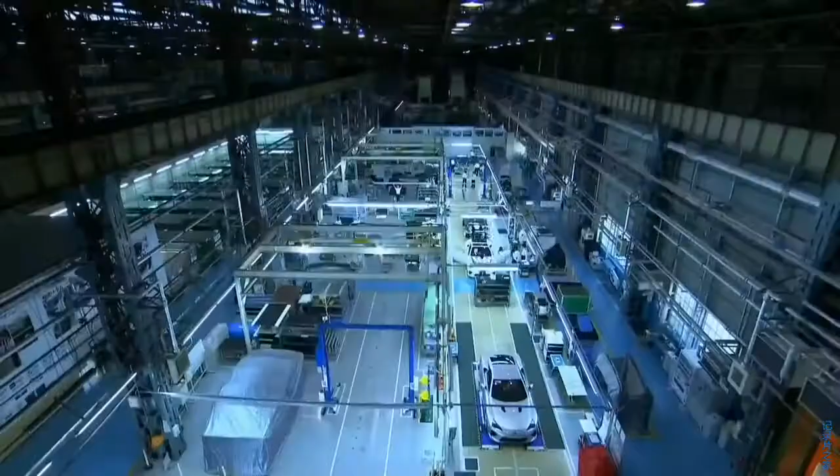Inside this top-secret mega factory, a car like no other is taking shape. Craftsmen hand-build what they consider an automotive work of art. Money is no object. This machine must redefine a billion-dollar brand. Failure, not an option.

Japanese marque Lexus sells itself on luxury, marketing its cars as elegant, quiet, high-tech and efficient. Now, a different kind of car wears the Lexus badge, the LFA. Aggressive, loud, agile. Highest revving V10 engine in a production car. 325 kilometers per hour. A car like nothing Lexus has ever produced before.

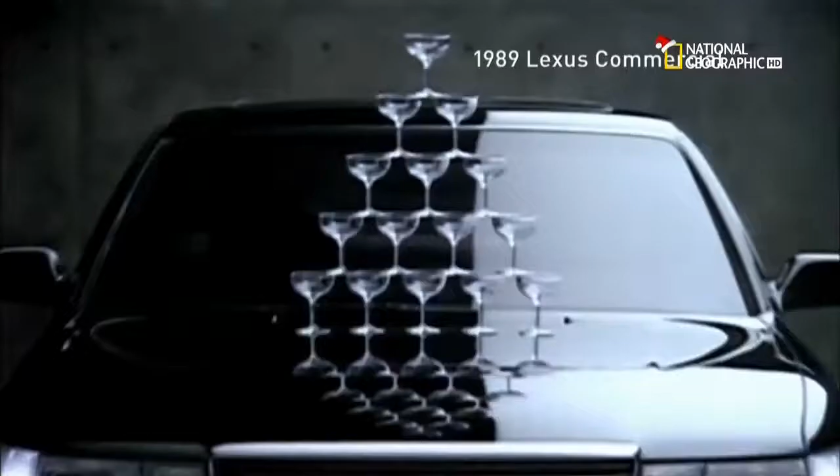Lexus is just over 20 years old. The world's largest car maker, Toyota, created the brand to compete with other high-flying luxury marques, Mercedes-Benz, BMW and Jaguar. It's worked. Lexus is now one of the biggest-selling high-end marques in the United States. But now, Lexus is out to inject more excitement into their brand.

Chief engineer Tanahashi Haruhiko is the man behind this vision. The LFA has a passion, an emotion that isn't in earlier Lexus cars. We wanted to move the brand in that direction. That's how we made this car. Tanahashi believes the marque can mean more than just luxury. I wanted to make a new sports car, one that could stand against the long-established European so-called supercars, Porsche, Ferrari and Lamborghini, to show that we Japanese could make something like that.

It's a risk. The company hasn't made anything like this before. Their reputation depends on its success. Chief engineer Tanahashi is stepping into the unknown. He must build a car, a team, and a factory from scratch. Basically, we proceeded at my discretion. And where there weren't any rails, I laid them down.

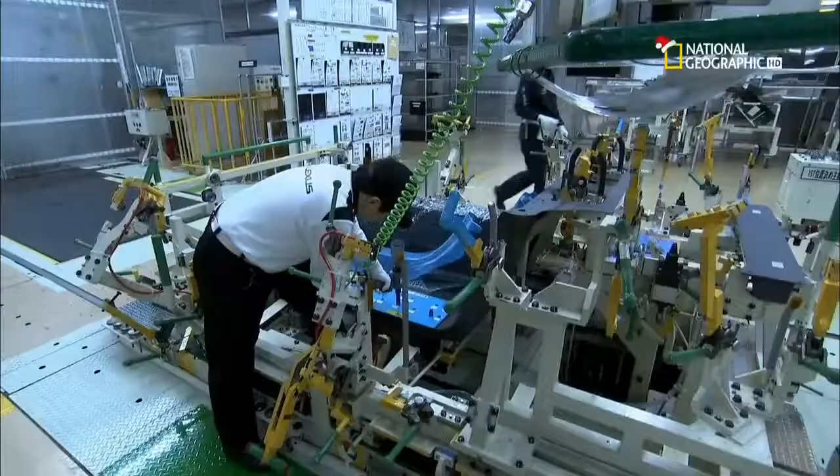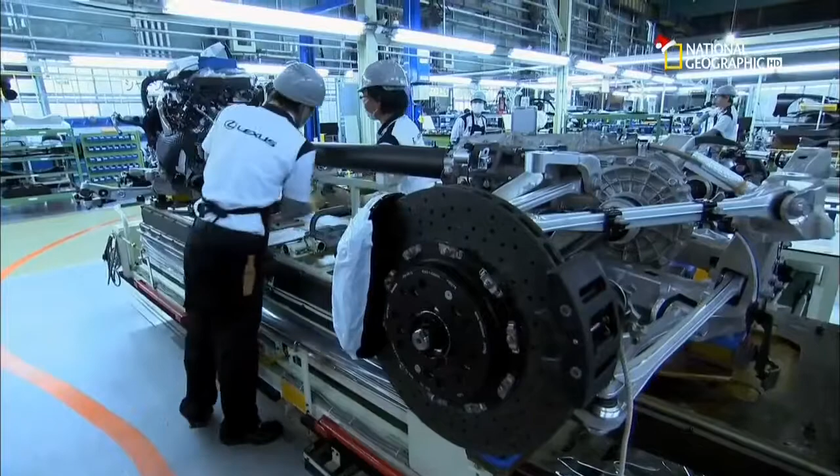All the associates here at the LFA Works feel they are artisans, not just operators. These artisans are known as takumi, Japanese for craftsmen. A status only conferred on the most highly trained, skilled workers. Each and every associate at the LFA Works is seeking to achieve perfection, taking this challenge on with a sort of samurai spirit.

Yamanaka Shigeru is manager of the LFA Works. His teamwork credentials come from another time-honored Japanese tradition: baseball. Before this, I was working as manager of the Toyota Motor Corporation baseball team, which brought people together from lots of different factories. It was because I could manage that organization that I was made manager here.

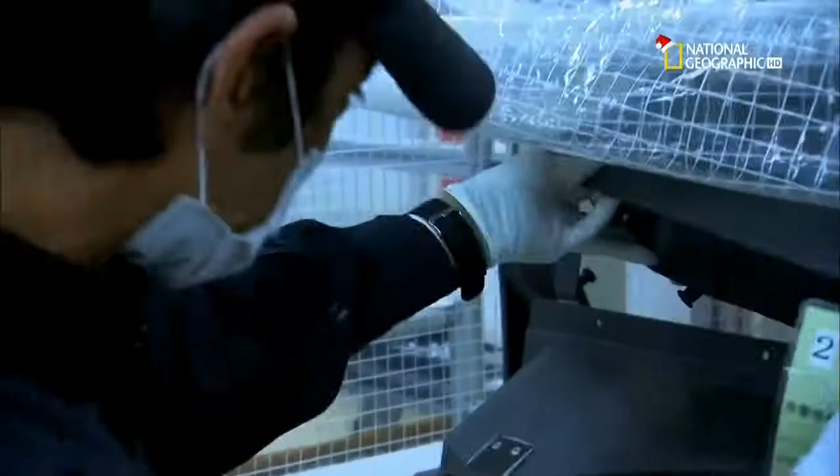To reach their goal, this tight-knit team utilized sophisticated tools and materials to build their car. The most important of these is carbon fiber composite. Carbon is crucial to the car's performance. It's a material 5 times the strength of steel, yet a quarter the weight. It's the construction material of choice for both Formula One racing cars and the aerospace industry. The company even make their own carbon fiber here on site. Up until now, no television cameras have ever been allowed inside this top-secret facility.

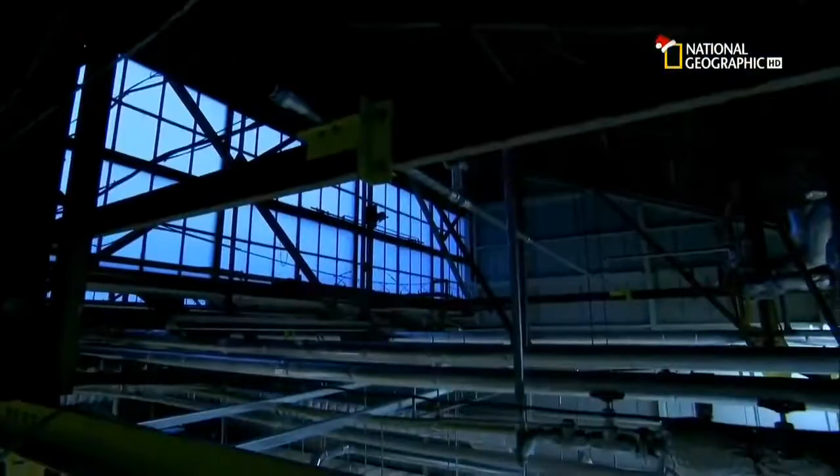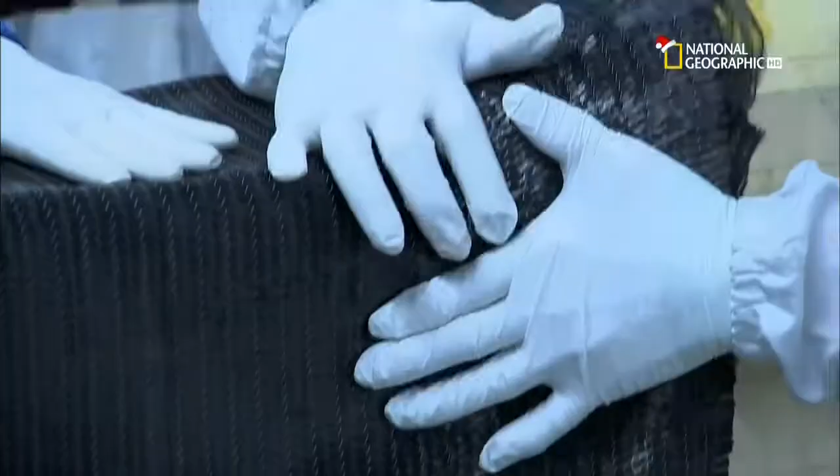First, simple strands of carbon fiber are woven into a pliable cloth using an automated weaving machine. This fabric is then transformed through heat, pressure, epoxy resin and labor-intensive techniques into the car's core known as the tub. The tub is pieced together like a 3D jigsaw. It starts with the construction of the floor. To make it, precisely cut carbon fiber cloth is lifted onto a mold. Next, skilled takumi smooth the supple fabric over the mold. This one is for the transmission tunnel that will house the drive shaft and exhaust.

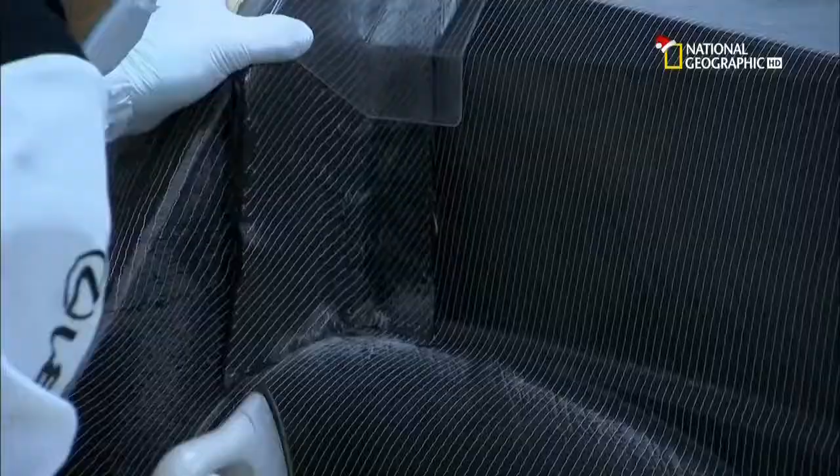In very complex areas like this, the fabric inevitably becomes frayed and not very neat. The associates work with these areas as if working with silk, taking great care every day. They also wear masks to avoid breathing in the hazardous fibers. In the beginning, the associates found it very difficult to work this material. It was much easier when they used an iron.

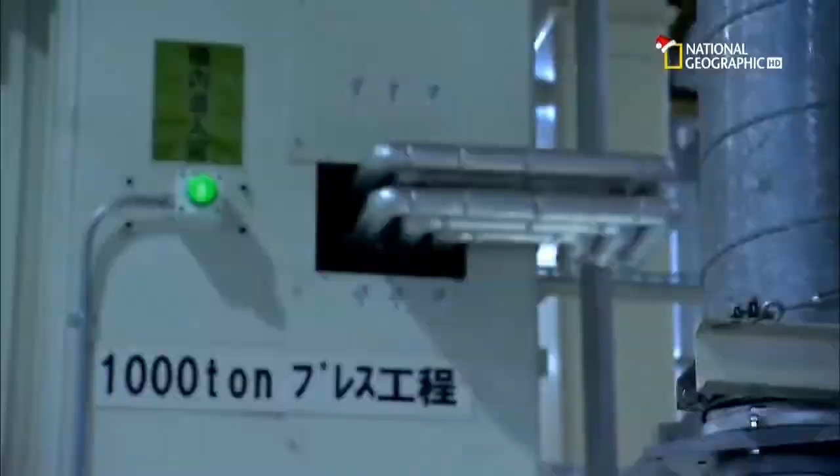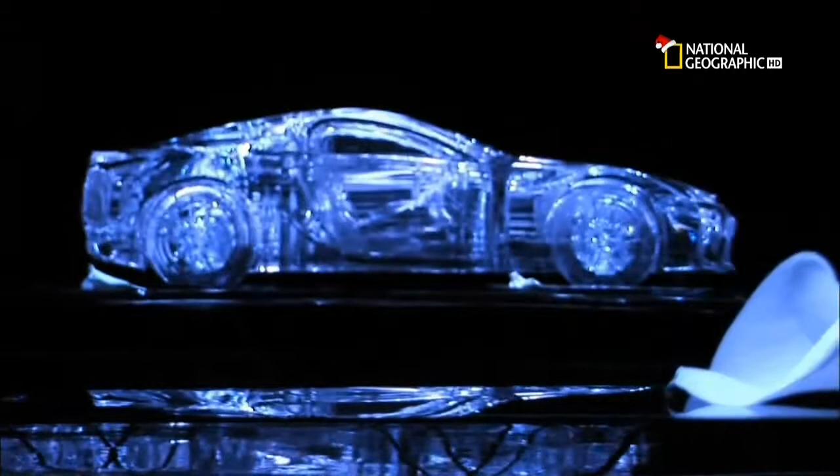Back in 2000, the concept of a world-beating supercar only exists in one man's head. At the company, I talked to just a small group of people at the top, not expecting anything, and they said, go ahead and try. With permission to proceed, Tanahashi gathers a team of engineers around him, and they start to make the basic engineering decisions. In the beginning, we planned to make the body from aluminium.

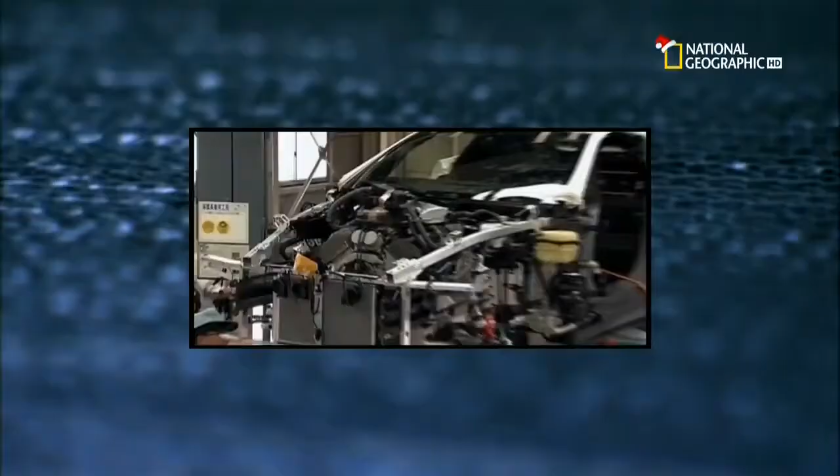But Tanahashi is fascinated with the possibilities offered by carbon. Developing a supercar, a super sports car, carbon fiber was a material I really wanted to try using, if at all possible. But this wonder material has its drawbacks. It's expensive, and the company has never used it to build any of their cars before. Despite these significant challenges, Tanahashi gets his way.

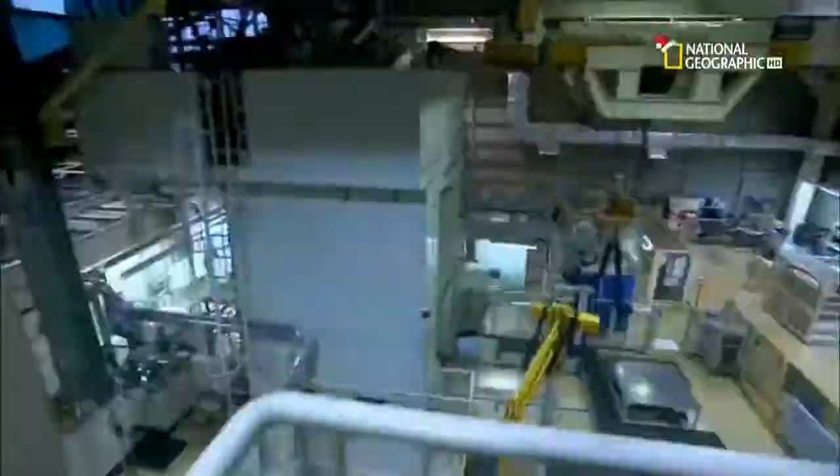In 2005, my boss said, why not go for carbon? Slapping me on the shoulder. And I made the decision to go for carbon then. It's a bold step. Everyone involved with this project must master a material they have no experience with at all. It was the first time the workers had touched carbon, and everything about it was difficult for the workers.

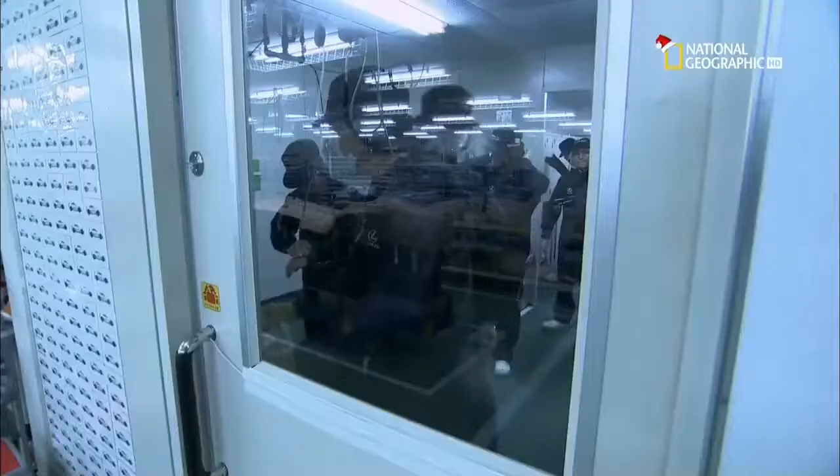In the state-of-the-art carbon fibre facility, the Takumi are returning from lunch. They vacuum themselves down to remove any foreign particles before entering a highly confidential sealed room. Here, the majority of the tub's central frame is created using the most intricate techniques. In this process, an automated laser cuts out hundreds of individual shapes from carbon fibre cloth that's been pre-impregnated with a sticky resin.

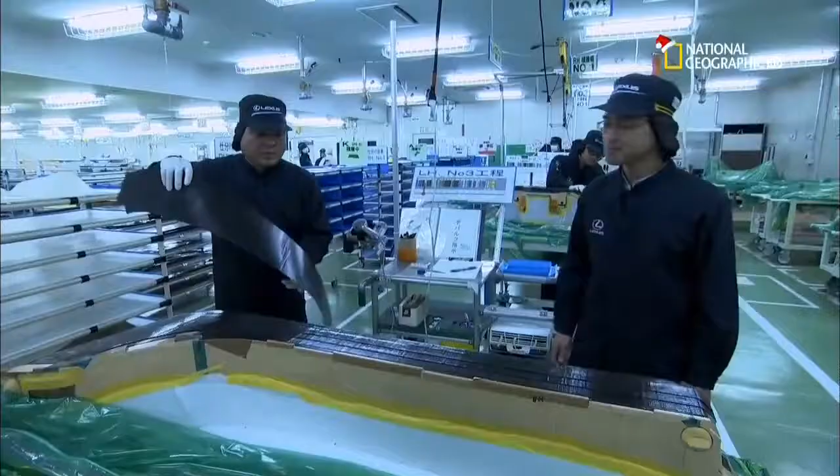Next, Takumi layer the cutouts, up to 20 sheets deep, onto a mould. This one will make the right side panel. The associate uses a dryer to raise the temperature of the laminate and half melts the resin as he applies it. The tacky cutouts stick to each other and any gaps are squeezed out using a vacuum bag that forces them together.

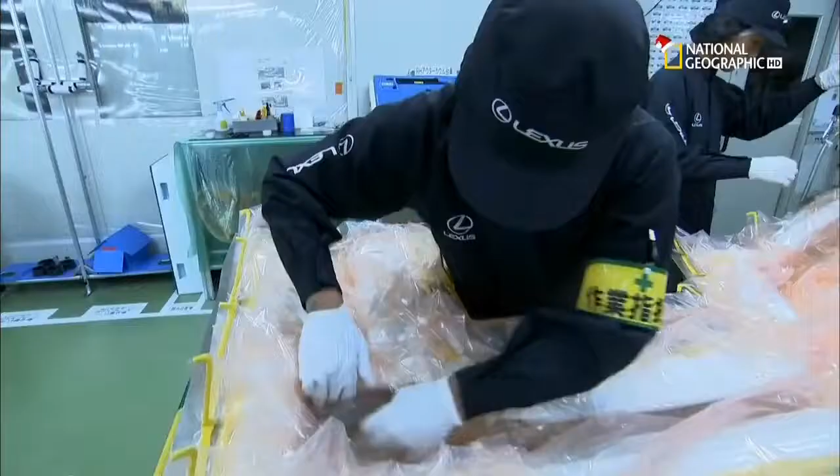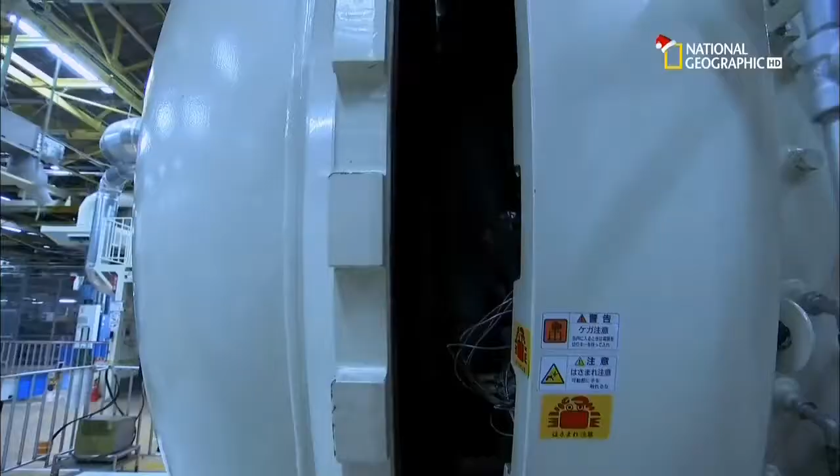The shrink-wrapped side panel is then wheeled across the works and loaded into a pressurized oven. Baking overnight at 150 degrees Celsius sets the resin, resulting in a side panel that's both ultra-strong and ultra-light. An aluminium equivalent would be twice as heavy. Weight saving is the holy grail for all auto engineers. Less weight and more power leads to increased acceleration, and speed defines a supercar.

The body of the LFA is 65% carbon fibre, helping it accelerate from 0 to 100 kilometers per hour in 3.7 seconds. If made of aluminium, it would be 100 kilograms heavier, like having a sumo wrestler in the passenger seat. As it is, this car weighs just 1,400 kilograms all in.

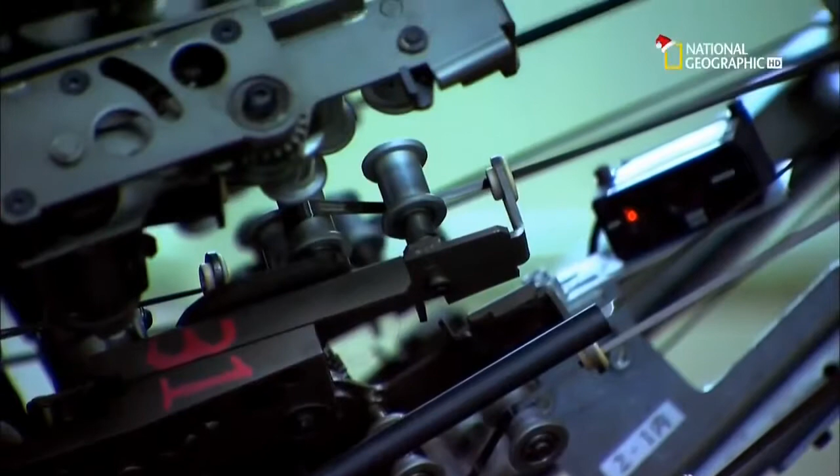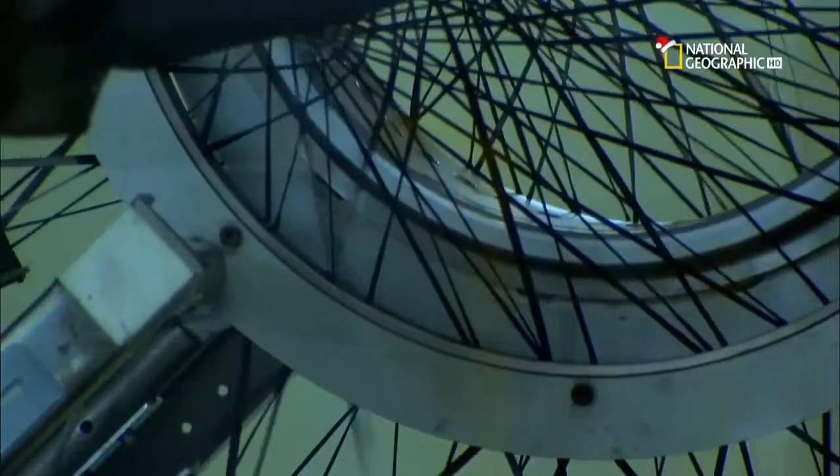Back at the factory, in a locked room, a bespoke machine creates two crucial parts to complete the tub's construction. The roof rails support the windscreen, as well as protecting the driver if the car rolls over. This custom-built circular loom weaves the carbon rail in 3D. It uses lasers to control the feed of carbon fibre strands onto 144 bobbins. These knit the carbon around a top-secret automated template that's fed through the centre of the loom. This is done twice over to cross-hatch the carbon weave, so giving the rail its strength.

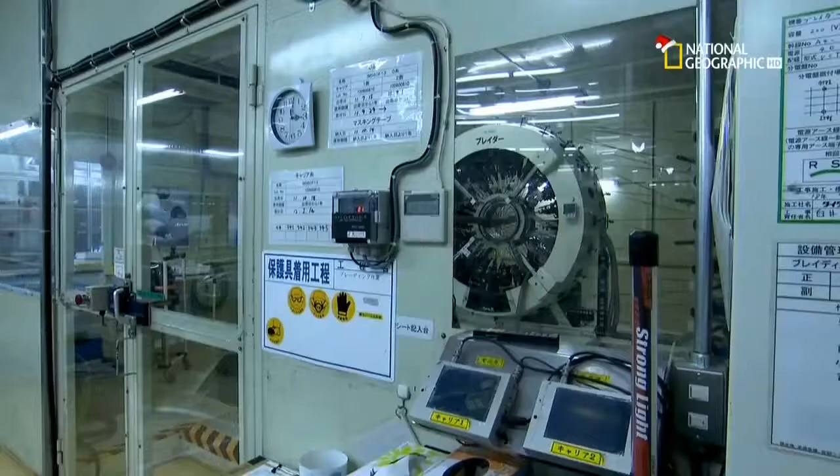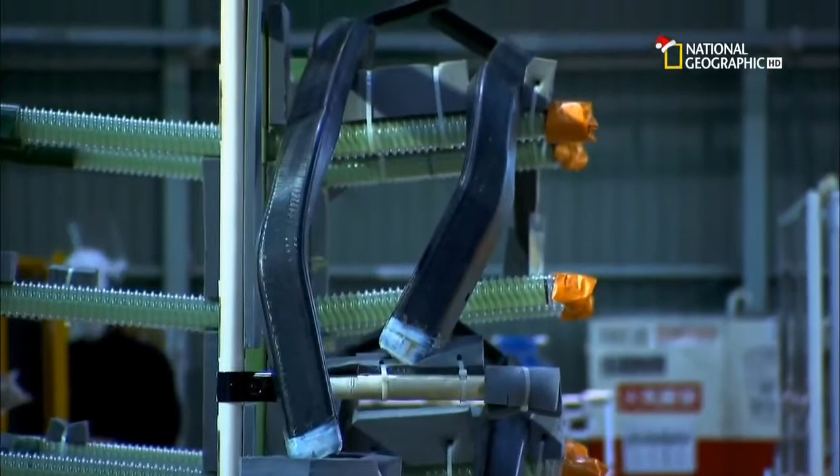The whole mechanism has its own control box, and for good reason. If something goes wrong, even a little thing, the shape gets distorted immediately, so the operator constantly pays attention to avoid this. The roof rail is heated and impregnated with more resin to complete its metamorphosis from a flexible tube to a rock-hard rail. You may think that this is quite heavy, but it is only 2 kilograms.

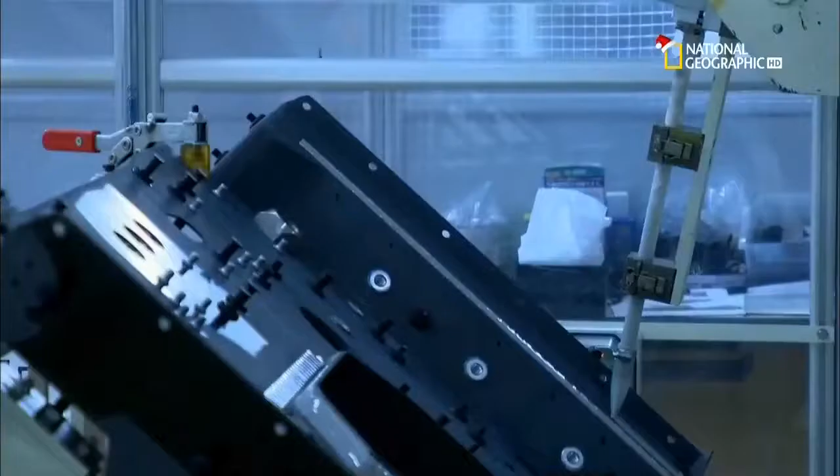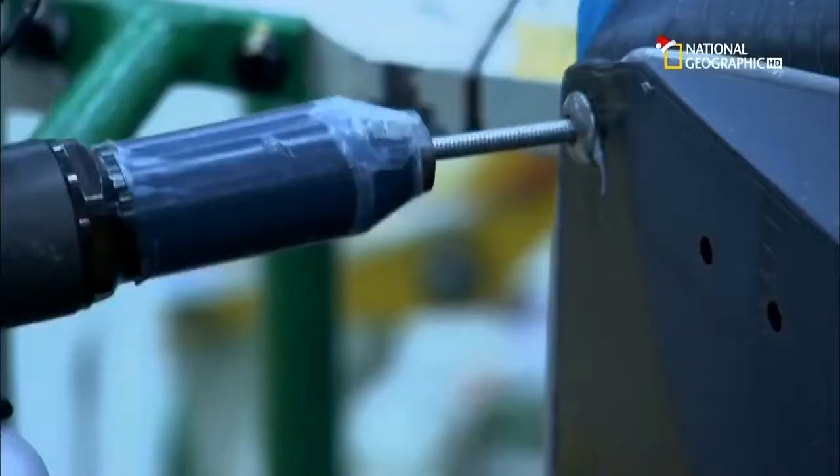The tub is bonded in another top-secret jig. First, a super-strong adhesive, known as epoxy resin, is applied by robot and hand to each of the parts. The separate parts are transferred to the jig and locked in place. Pop rivets keep the pieces aligned. To cure the epoxy, the jig is pushed into an oven and then baked for 60 minutes at 60 degrees Celsius. The resulting tub is so strong, it acts as both the structural core of the car and as a crush-resistant safety cell, should the car crash.

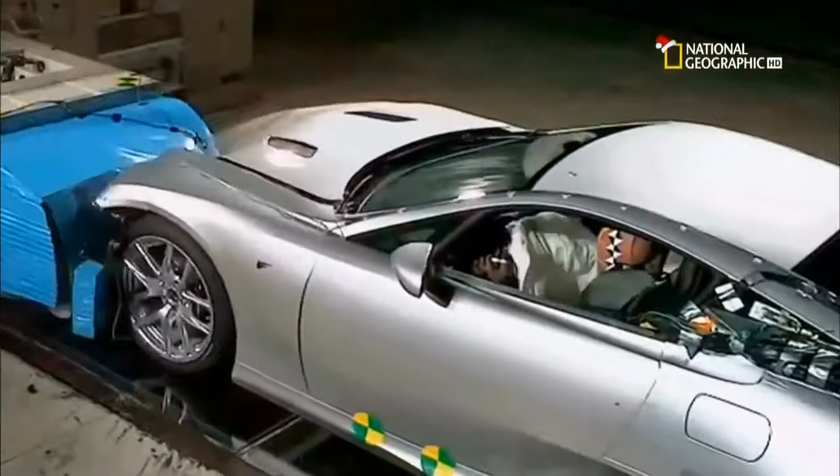The challenge now is for Matsumoto Kengo, chief designer of the LFA, to create a car with a body as technical as it is elegant. For us, aerodynamics, heat and airflow management should be tangible in the design.

A conventional car cools its engine with forward-mounted radiators that suck cold air through a front grille. Not the LFA. Front space is at a premium, so coolant is pumped from the hot engine to twin radiators mounted behind the car's rear wheels. Matsumoto had to shape the car to funnel cold air to these vital components.

Airflow management is optimally controlled by setting the angle between the door mirror and the cabin. It goes past the cabin and smoothly into the air intake for the rear radiator. This shape is not just for styling. The intake is deliberately formed here, from the base of the glass. The result is an airflow system capable of cooling the engine even under the most extreme race conditions.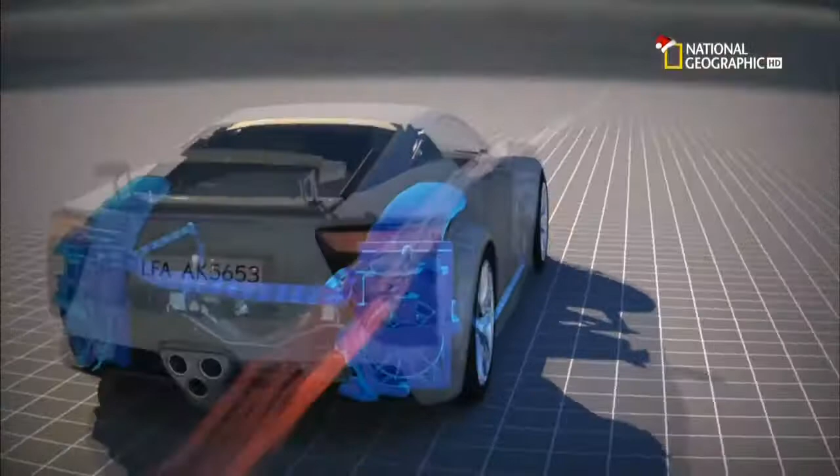It's 8:45 in the morning at the LFA works. The Takumi are warming up for an 8-hour shift ahead. Their first task is to greet the bare cabin as it arrives from its 15-day build in carbon round the corner. In assembly, the cabin will progress through 4 positions: trim, chassis, final, and alignment.

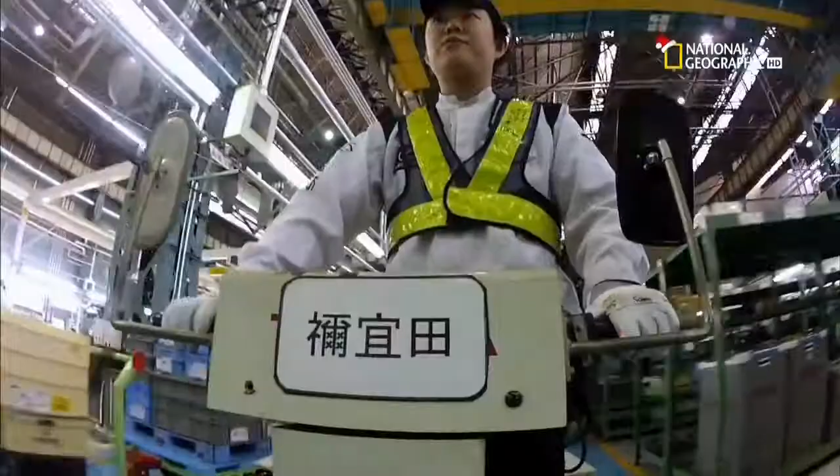15,000 parts go into making an LFA. The first of these are attached here in trim. Just meters away, other Takumi assemble the drivetrain and suspension. The drivetrain comprises the transmission, torque tube, and last but not least, a 4.8-litre V10.

The location of this engine is crucial to the car's entire concept. I wanted to build the car around the people in it. And for a supercar that puts people first, the optimum place for the engine is front mid. This front mid location puts the engine between the driver and the car's front wheels. With the transmission placed at the rear, the driver is in the centre and the car feels balanced to drive.

The aim is to make the car's handling as good as possible. But a front mid configuration dramatically restricts the space available for the engine. Tanahashi has a problem. You need an engine of a certain size with a certain degree of compactness, but you want a high-powered engine as well. Tanahashi needs a small engine to fit in the restricted engine space, but he also needs the power of a large engine because power equals speed.

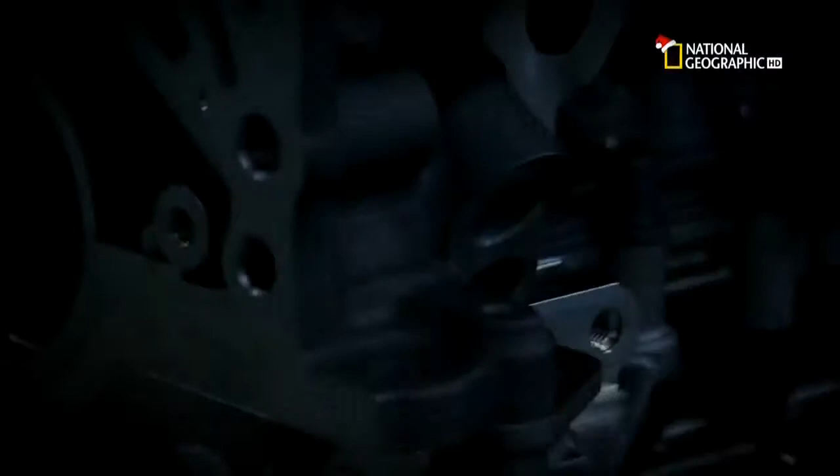And that isn't all. The high-pitched sound of Formula One makes you shiver, doesn't it? I really wanted to have that as part of the LFA. Only a high-revving V10 engine supplies this combination of power and sound, but a traditional V10 is too big for his mid-front configuration. Lexus have made nothing like this before. Their production line cars use 6- and 8-cylinder engines engineered for a super quiet ride. This V10 will be the opposite.

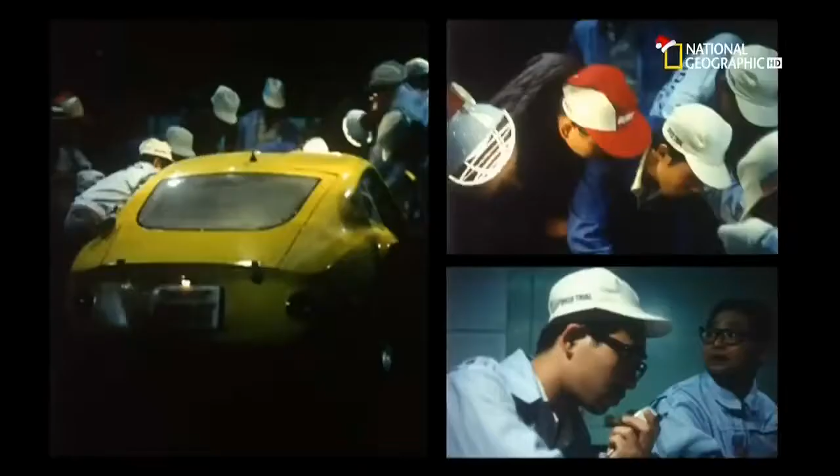Tanahashi turns to some old friends for help. We are a motorcycle manufacturer. We understand power alone is not enough in a vehicle. For a sports car, small and lightweight is critical. For almost half a century, Yamaha have worked with Toyota to create high-powered lightweight engines and cars. The legendary 2000 GT, star of the James Bond film You Only Live Twice, and Japan's first true sports car, was the first fruit of their collaboration.

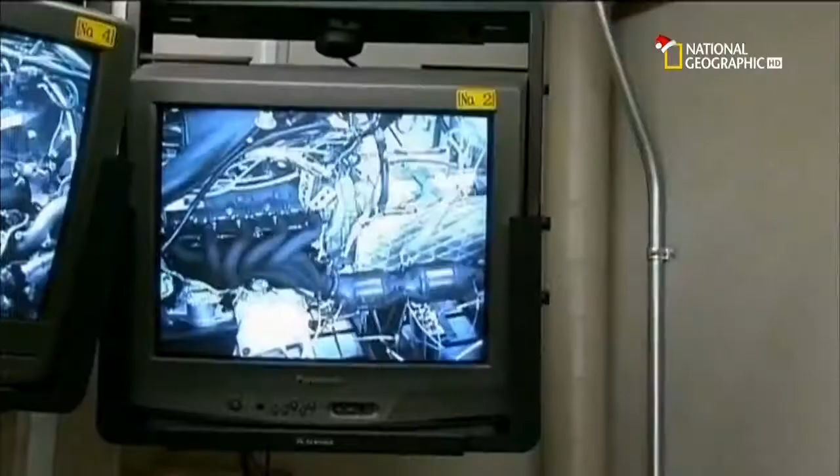Headed by Lexus engine guru Okamoto Takemitsu, the team sets itself an ambitious goal: to create a naturally aspirated V10 engine as compact as a traditional Lexus V8, with the weight of a V6. I wanted to create something different to any other supercar engine. Normally, engineers use turbochargers to boost the output of smaller engines to simulate V10 power. But turbocharged engines don't have the rapid response, acceleration or sound of a naturally aspirated V10.

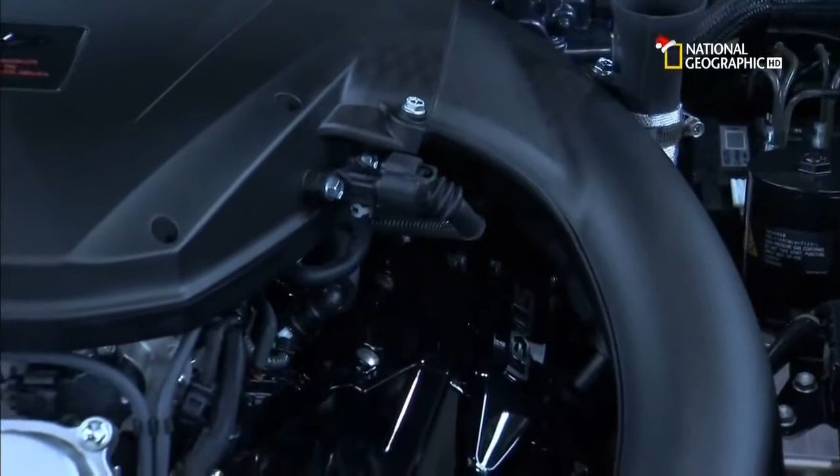By using Yamaha's motorcycle know-how, the lightest metals and redesigning the engine's guts, Okamoto creates a masterpiece of engineering. A non-turbocharged compact V10 that fits into a mid-front design while keeping weight to a minimum.

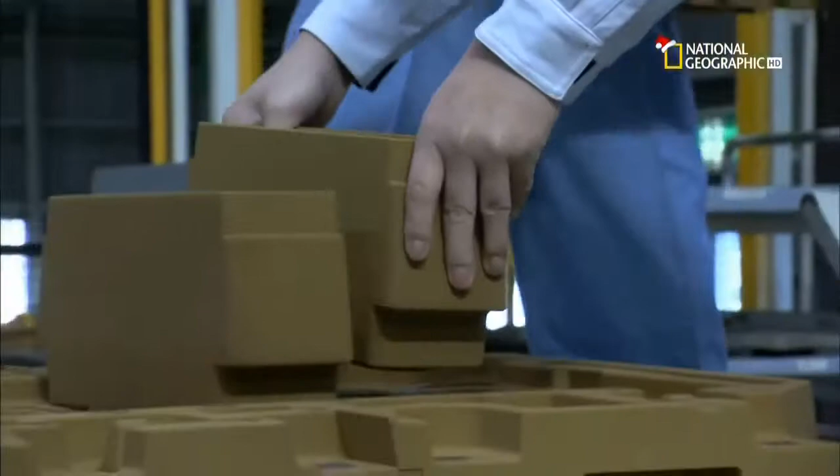The engine starts life in Toyota's Miyoshi plant as molten aluminium. It's cast in a 3D resin-impregnated sand mold made from 37 individual blocks that take a week to fashion. With the blocks fitted together, the mold is ready to be filled. At 750 degrees Celsius, impurities are scooped off the top of the molten aluminium.

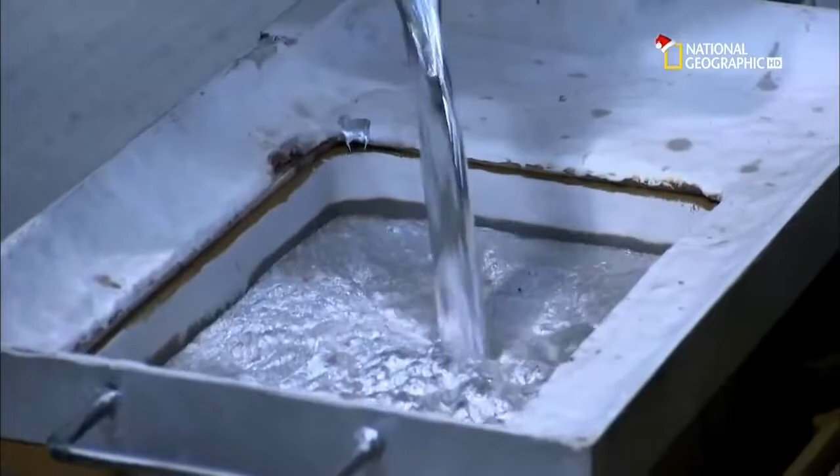The liquid metal flows into the mold as a vacuum sucks out any contaminating gases. Two hours later, with the metal set, the sand is hammered off to reveal the solid aluminium engine block inside.

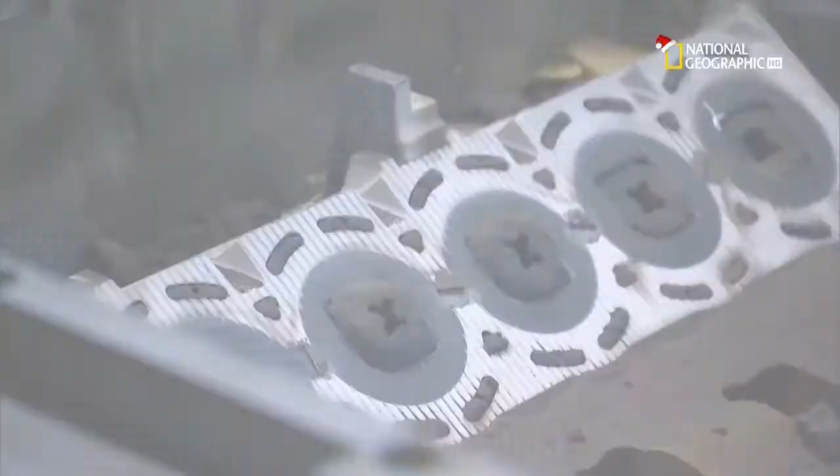It's off to Toyota City's Honsha factory and the company's highly confidential Formula One engine facility. These works are always off limits. We're going to go in. Are you ready? Come in. Television cameras have never been allowed in here before.

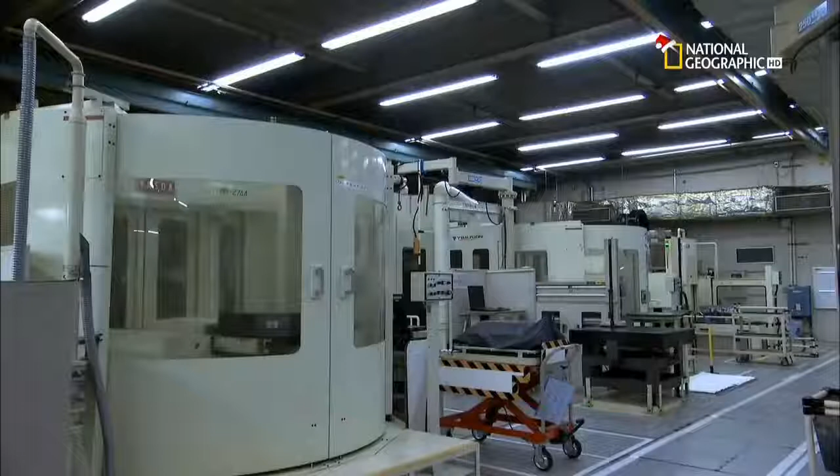For a decade, Toyota spent big competing in Formula One racing. But without a win in 139 races, they withdrew in 2009, leaving this state-of-the-art facility idle. For the LFA team, it was too good an opportunity to miss. The close parallels with F1 engine technology make this milling facility a ready-made fit.

In these million-dollar automated machining tools, the rough engine casts are milled, drilled and polished before emerging as precisely spec'd engine blocks. Then the robots hand over to humans. In a sealed room, Takumi hone every sharp edge using precision polishing tools.

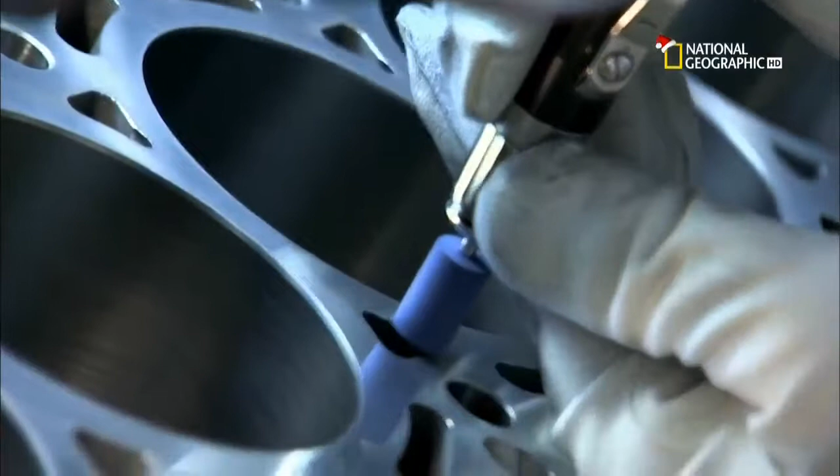Finally, a highly skilled Takumi pre-assembles the finished engine blocks to check they fit precisely. These blocks and screws are paired for life. Disassembled, they travel as a unit to Yamaha's Iwata city plant, 90 kilometers southeast of Toyota City.

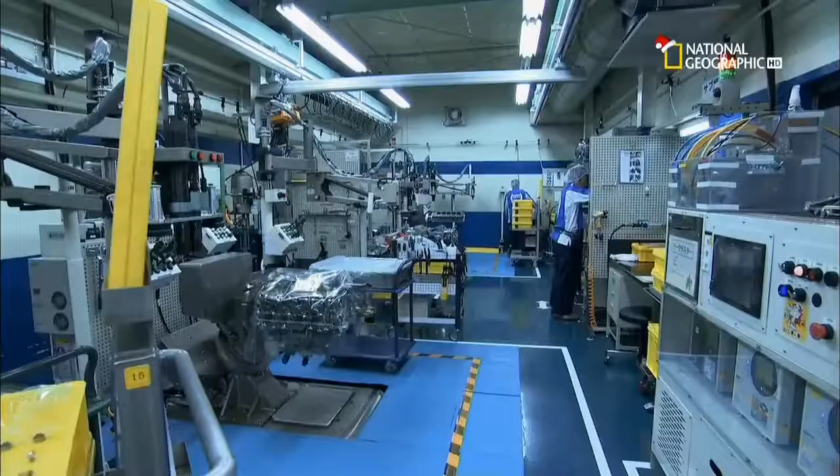The engine room here takes obsession to new heights. As you'd expect, hairnets and airlocks prevent any particle contamination. But the room is also kept at a constant temperature and humidity to ensure that every engine part is at the same state of thermal expansion during assembly. This is more laboratory than workshop.

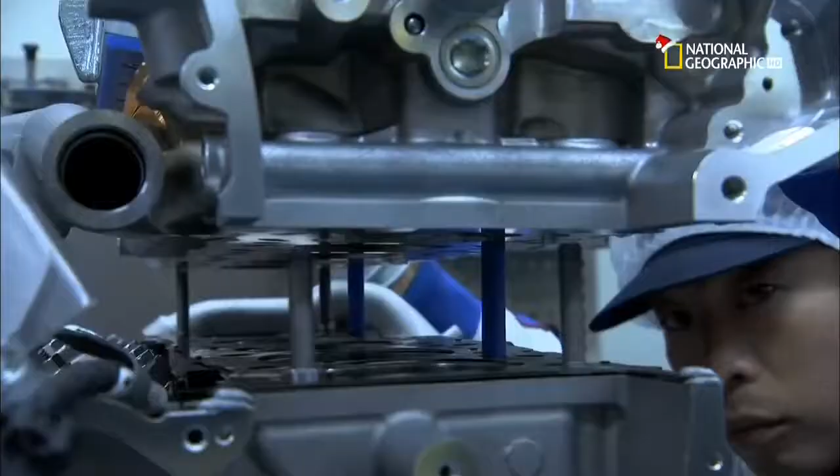The 2,200 engine parts are divided into 61 different kits for assembly by number. 4 highly trained Takumi work here. Each is responsible for a single engine from start to finish. To avoid any mistakes, they follow a series of on-screen instructions. It takes 2.5 days to complete the build of one engine. Each hand-assembled engine bears the Takumi signature.

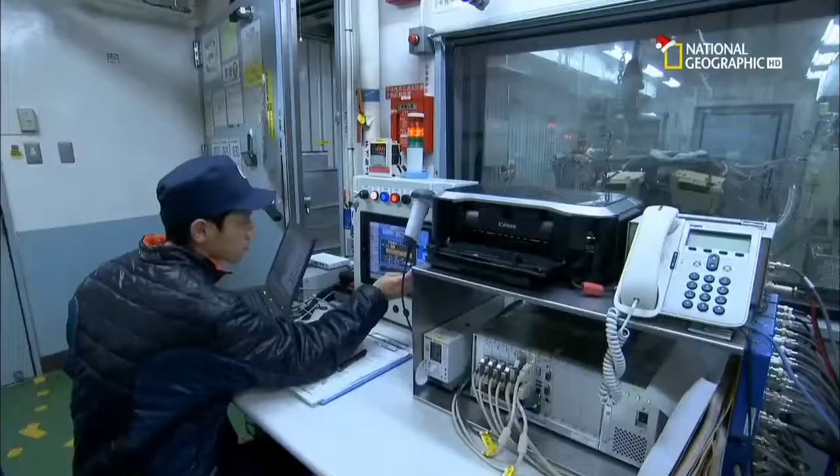Before this masterpiece goes anywhere near a car, it undergoes a half-day of exhaustive testing in the room next door to engine assembly. The resulting 4.8-litre engine is so responsive that it takes just half a second to reach 9,000 RPM. That means instant acceleration, whatever gear you're in.

This engine has excellent response and more RPM than any other commercially available engine. Response time is so fast that a digital rev counter is the only unit able to keep up. And the sound of this high-revving engine is unmistakable. The sound of the LFA is unique, and once heard, never forgotten.

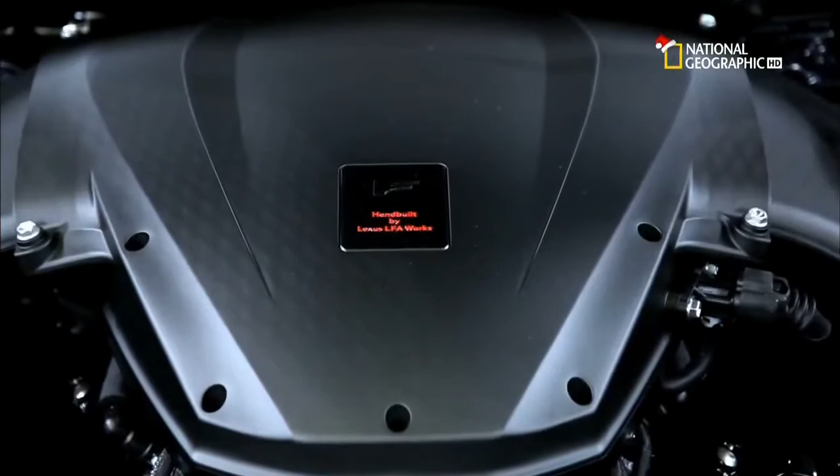To achieve the engine soundtrack that Tanahashi insists upon requires more of Yamaha's specialist knowledge. We are a manufacturer of musical instruments, so when it comes to sound technology, we have a certain level of know-how. Honji Yoshikazu is obsessed with sound.

I think the relationship between a super sports car and its driver is like the relationship between a top musical performer and their instrument. When they play in a certain way, they can listen to that sound and use it to produce another, better sound.

Critically, a car has 2 different sound characteristics. One sound is the exhaust. You can call it an iconic sound. Just by hearing that sound, you know which car it is. The other, which we were particularly concerned with, is the sound heard by the driver.

To refine the driver's soundtrack, Heiji Maruyama, general manager of Yamaha Motors, had to redesign the component that sits on top of the engine, called the surge tank, by turning convention on its head. The function of the surge tank is to send air equally into all 10 cylinders. Normally, techniques to reduce noise from the intakes are used. We thought to go the other way and use it to amplify the sound, to communicate it to the driver.

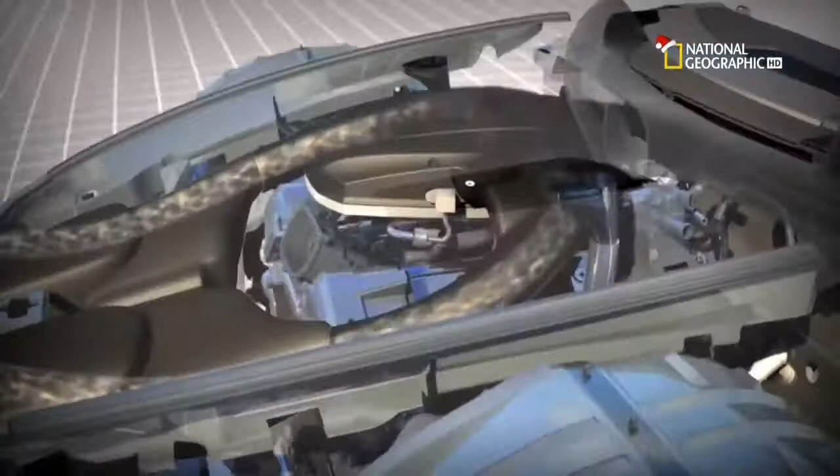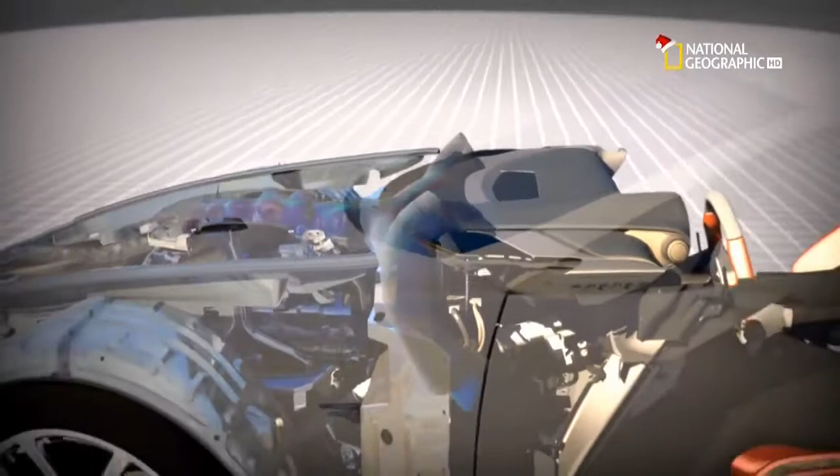Maruyama tunes the chamber by varying the thickness of the surge tank's upper surface and adding internal vibrating ribs. The construction is very like that of an acoustic guitar or violin. The team channel these good vibrations back into the cabin using sound passages. We use these to send low-pitch sound to the driver's feet and higher frequency sounds through at ear level. The driver is in the middle of this dynamic surround sound system.

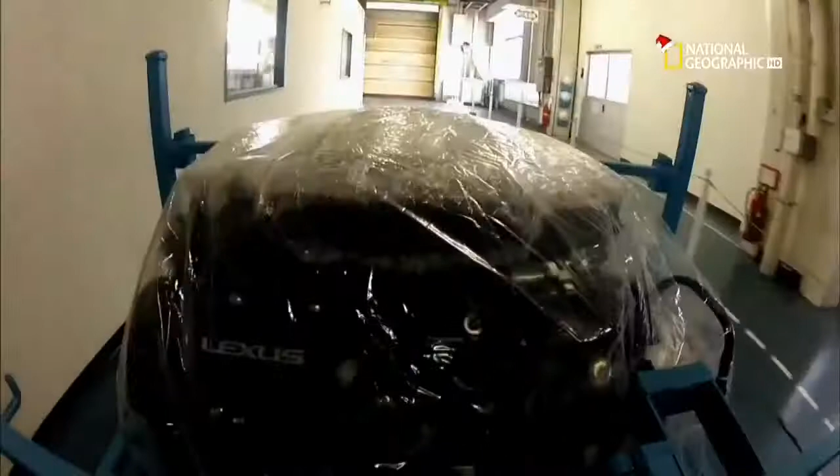The completed engine is forklifted onto a waiting truck for shipment back to the LFA works. Here, as part of the assembled drivetrain, it's inserted into the cabin's belly, guided only by eye.

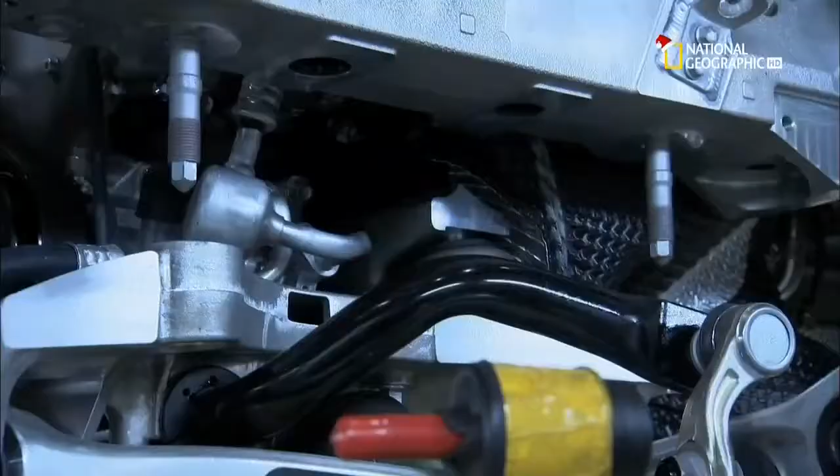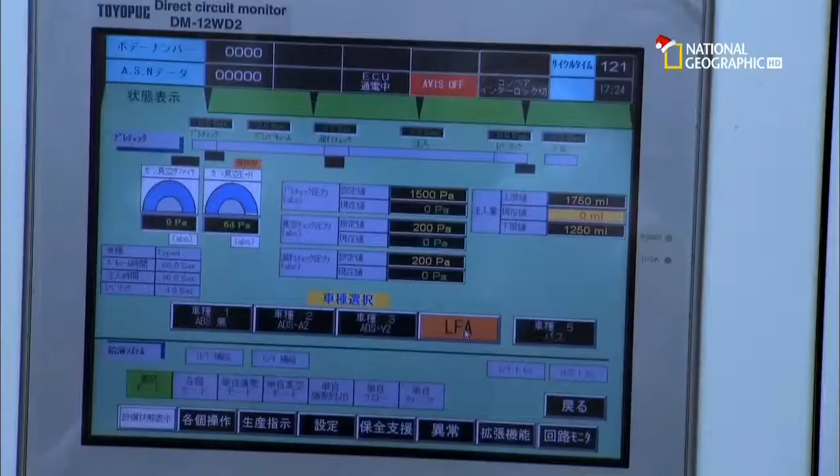With the guts of the car in place, it's time to feed them. An automated pump injects engine oil, brake fluid and coolant into the appropriate underbonnet opening. In Japan, machines play a tune to alert anybody nearby that they're running. This one plays an American folk song. With the precise volume of fluid added, the pump stops, as does the music.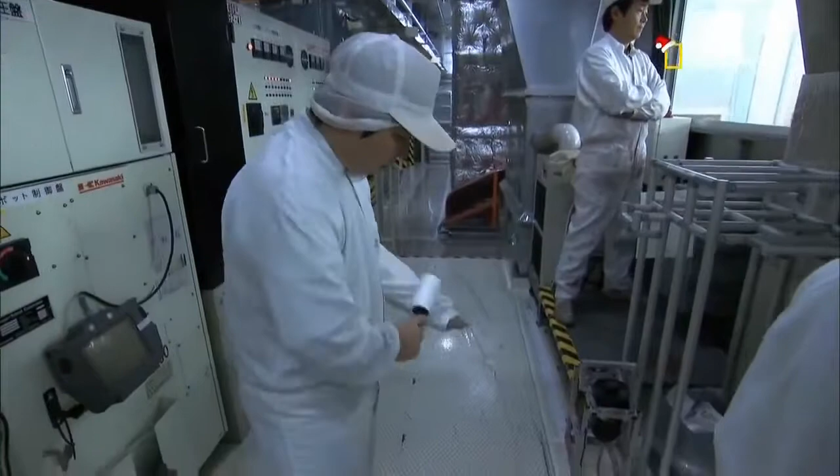But there's always an ongoing human battle in the paint department. Dust is the greatest enemy for painting. If dust gets into the paint surface, when it's heated, the dust swells up and causes a blister. So the atmosphere is controlled on a daily basis, and there's a strict dress code. Up to 5 layers of paint are applied. And where robots can't reach, humans can.

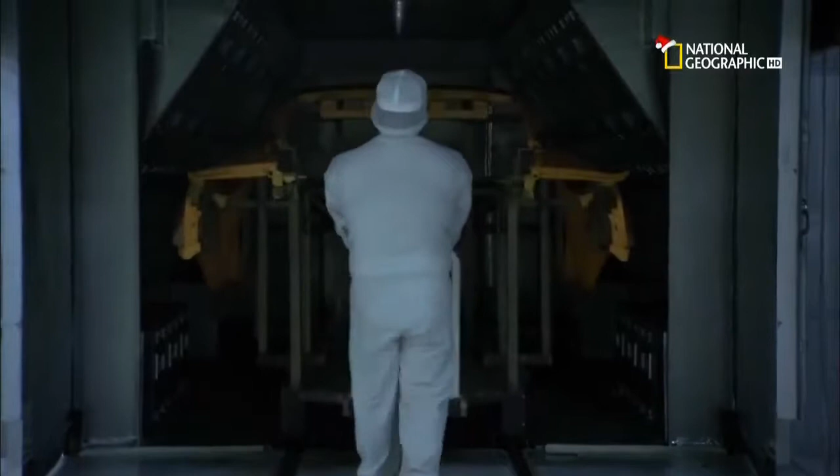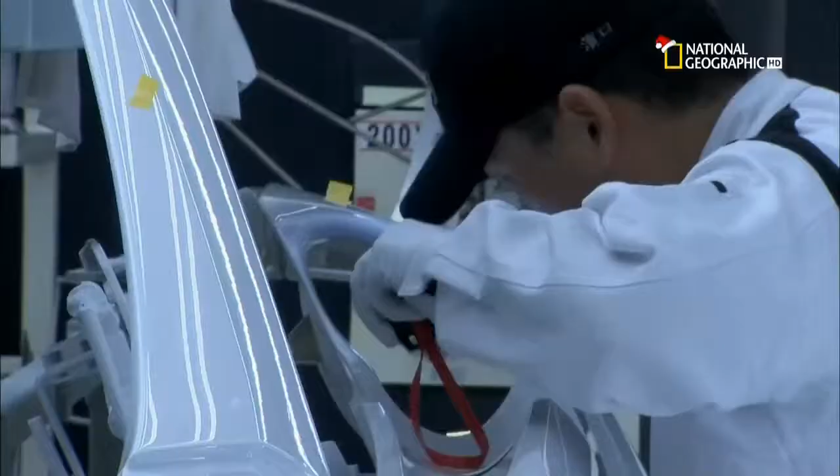Job done. The sprayed panels are dried in an oven at 100 degrees Celsius for 50 minutes before being wheeled out for inspection. The battle against dust continues, with water nozzles spraying a fine mist into the air to stop anything drifting onto the pristine surfaces. A bright light inspector spots any blemishes and marks them up to be polished out.

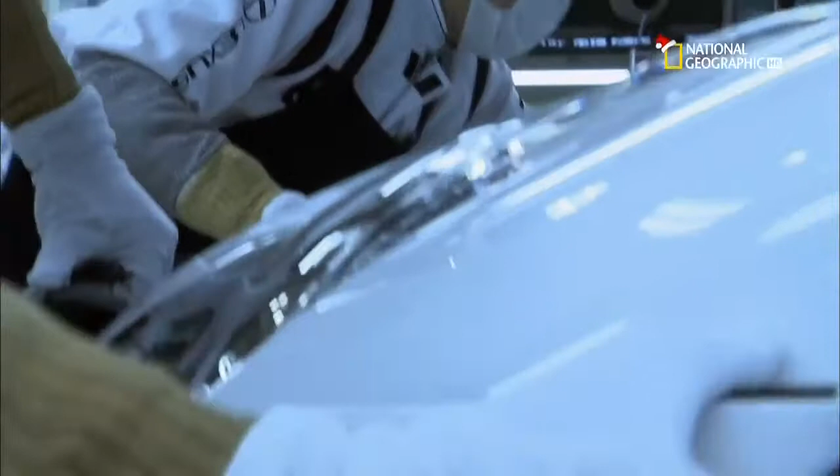The completed panels are wheeled out of paint across the factory floor and attached to the carbon tub back in assembly at the 3rd position on the line, known as final. Here, the hand-stitched leather interior is installed, and the forged aluminium wheels with bespoke Bridgestone tyres are also fitted. It looks as if the associates are performing each task very slowly, but every one of them is working very carefully and with a high degree of certainty. If you compare it to a sport, they are top players who complete a successful play every time.

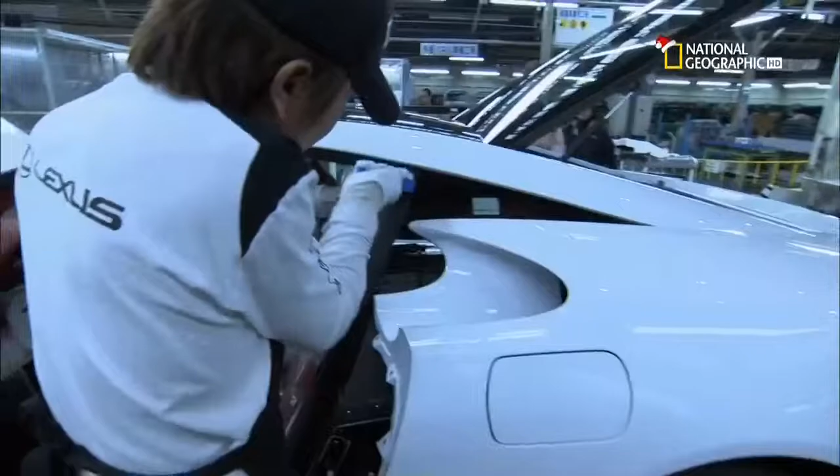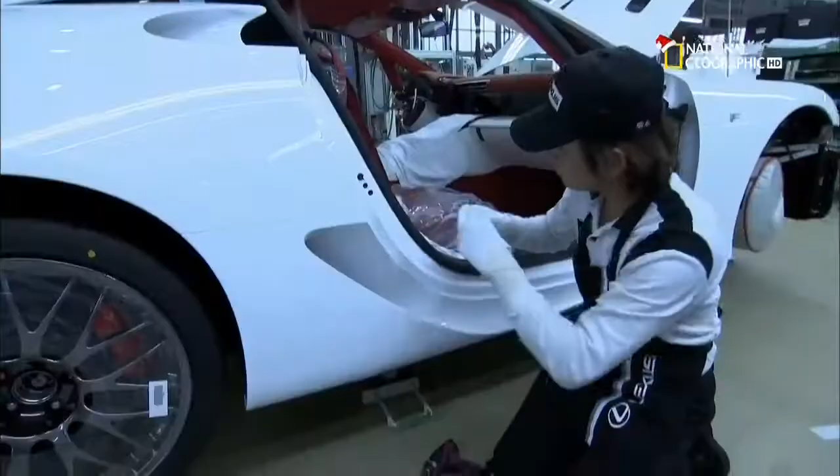The LFA works runs like clockwork, yet there's no clock watching. The reason why there is so much time is that Chief Yamanaka tells us to take our time and work slowly, so that we can make something that we know is good. How can I put it? He says that in order to ensure quality, we can take as much time as we need. That goes for overtime as well. If it means we make something good, then we can do overtime.

The only stipulation is that one car must drive off this assembly line every day. And from the beginning, Chief Engineer Tanahashi was clear that only 500 would be built. At a car a day, that will take just 2 years. And then, this factory will close. Making only 500 cars positions the LFA as a very special car. There is no plan to make any more at all.

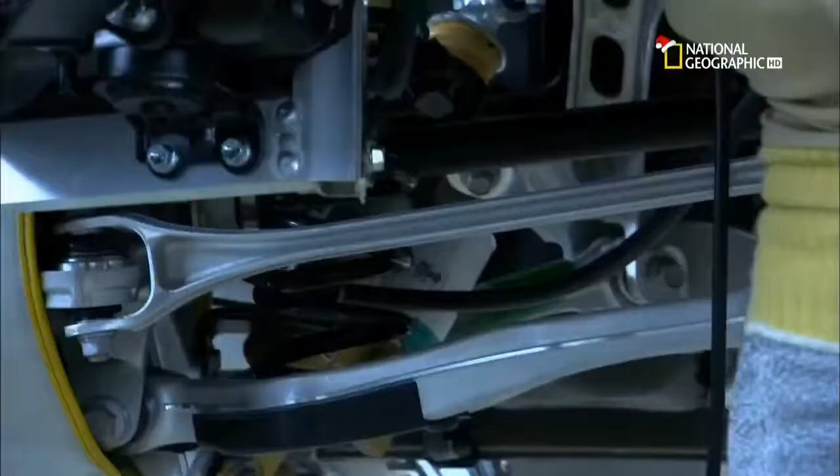Even pricing the LFA at $375,000, the most expensive Japanese road car ever, a limited production run isn't going to recoup the costs of development, the use of cutting-edge materials, and unlimited overtime. I think it will be difficult to make a profit with only 500 units delivered. But by producing the LFA, the Lexus brand gains in value and is well received worldwide. I think the legacy will be left in technique, knowledge and teamwork for making cars that will please our customers in the future.

Back in 2004, with the prototype build, Chief Engineer Tanahashi takes a bold decision. He wants the car proved on the severest of tracks. Nothing in Japan fits the bill. So he takes the entire development team to the notorious Nürburgring in Germany. For us car makers, the Nordschleife on the Nürburgring is like a mecca for cars. This is where this car was honed. The 20-kilometer Nordschleife section of the Nürburgring is infamous as the world's most punishing test track.

For 4 years, the team tests every aspect of the car's engineering around the Nordschleife's dips, jumps, relentless corners, and flat-out straights. The car's development makes progress towards its production deadline, but Tanahashi wants to fast-track its fine-tuning. In 2008, he throws it into the unforgiving world of racing and enters the Nürburgring 24-hour race. It was purely to get more feedback on the production type LFA and to improve it under real race conditions.

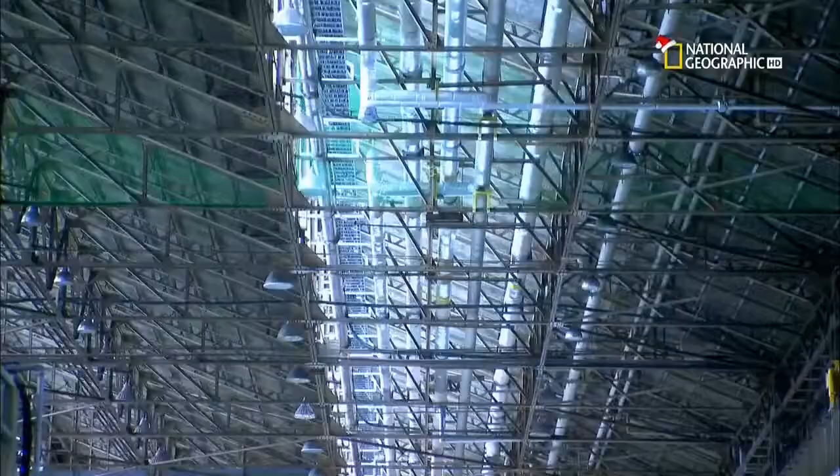The brutal experiment works. A year later, the revised car wins its class. Tanahashi is finally happy, and in 2010, the LFA goes into full production. And when in 2011, a special race edition of the standard LFA is launched, its name pays homage to the racetrack that forged it. It is with thanks to that sacred place that we called it the Nürburgring package.

This Nürburgring package has a retuned engine which pumps out 571 horsepower, 11 more than the standard engine. This extra power requires more downforce to keep the car on the track, so the rear spoiler is larger and fixed. And left and right canard fins on the car's front bumper also increase downforce. The stiffer lower suspension makes it more suitable for a life on the track.

Finally, to increase acceleration, the computerized transmission is upgraded to change a split second faster. It all adds up to a Japanese supercar. Only 50 will be built, each with a price tag $70,000 more than a standard LFA. Back at the LFA works, in assembly's last position, the wheels are aligned to ensure the car handles perfectly. After 3 days in assembly, the car officially moves to inspection.

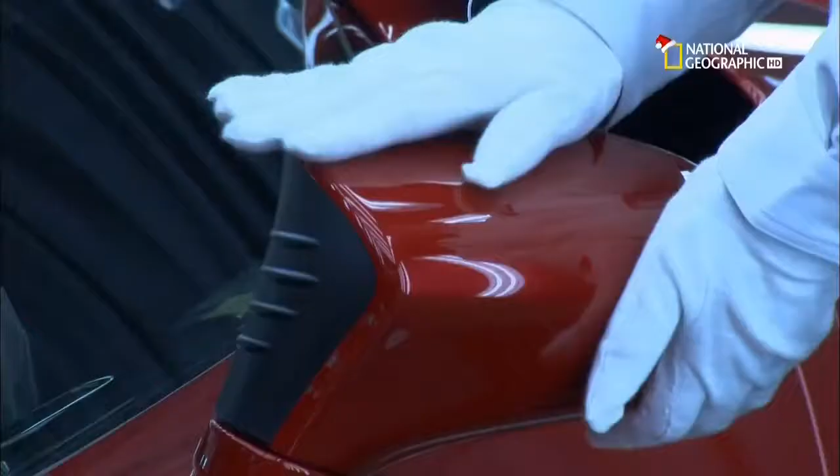The inspection process involves 7,000 separate checks. Hayashi Katsumi does the first of 1,482 of these under lights. Right now, I'm inspecting the paint surface. I'm using my hands to feel for any uneven areas in the bodywork. You have to touch it gently, like I'd touch a woman. I've been doing this job for 30 years. If I didn't have my wife, then it would certainly be my lover.

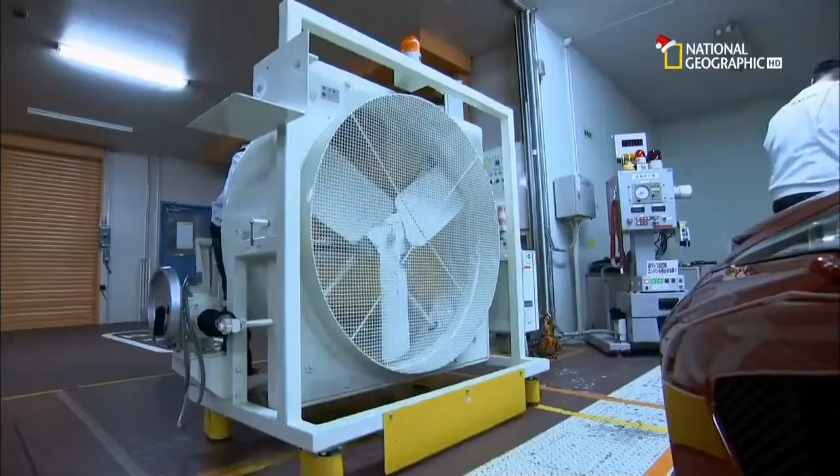With the internal and external surface inspection signed off, the car leaves the LFA works for good. It's driven through the Motomachi plant into quality control. This will be its home for the next 7 days. The checks performed here range from speedometer and brake tests to water tightness. The reports fill a 350-page booklet.

Finally, test driver Amano Nobuaki ensures each of these cars is road ready when it leaves the factory. The car is bedded in on Motomachi's very own test track. The mask sections of the bodywork are to protect vulnerable areas from stone chips. I think this is the best possible job in the world. Amano checks the car's controllability, engine sound, power, braking performance and vibration noise on the 1 kilometer track.

There is one danger driving this car every day. Every now and again, I just want to forget the job and drive this car away somewhere to have for myself. This car is complete and ready for its owner. To date, all 500 LFAs are spoken for. No more will be sold.

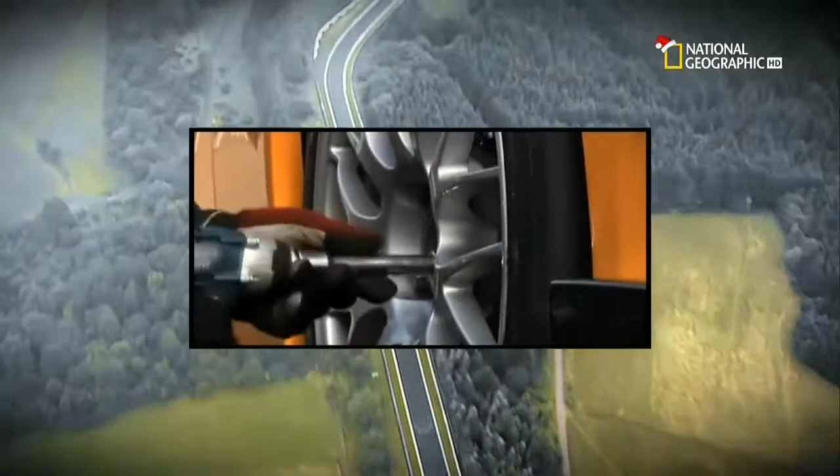The Lexus brand is safe, but Tanahashi still has something more to prove. In 2011, the team reassemble at the Nürburgring to put the car into the record books. They're out to beat the fastest official time by a road-registered production vehicle. This is the chance for the Nürburgring package to prove its pedigree. With test driver Ida Akira behind the wheel, the team held their breath.

I pushed the car on every corner. There are over 150 corners, driving very aggressively, but at the same time, I enjoyed it. To beat the record, Ida must average 167 kilometers per hour over the track's 20 kilometers. I had no concept of the time when I crossed the finish line.

Seven minutes, 14 seconds. The fastest official time by a production car not using slick race tyres. And the 5th fastest time ever. It was an unbelievable moment. It's one of the best moments of my life. There are a lot of sports cars, but this one gives the driver a really direct experience of driving. This is a very emotive car, a driver's car.